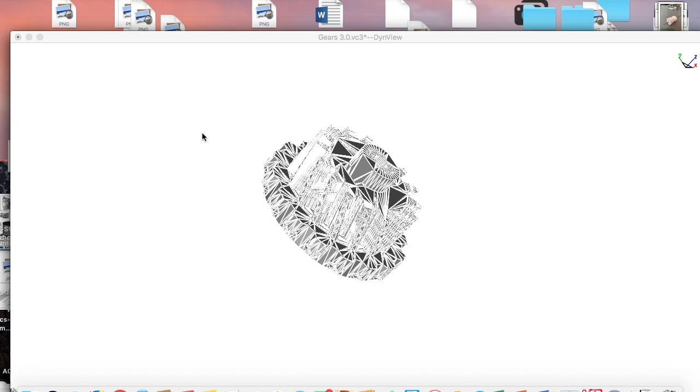Okay, so these are the gears that I have designed, but I did them in SolidWorks as I explained in my ERN, and I will explain during the presentation day, and that's why you see all of these different lines.

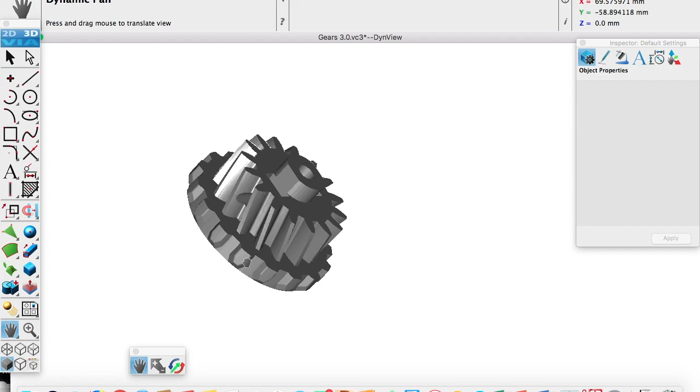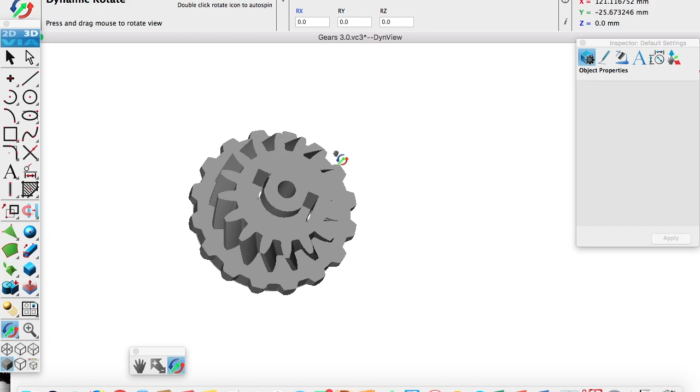When I click it, it looks fine, but the way it goes from SolidWorks to VCAD, something goes wrong. The difference between making it in SolidWorks and VCAD is like the difference between a hypercar and some regular car you find every day. It's like black and white versus color.

It's so much easier, so much more intuitive. That's why. The reason I have all these in one file is just when I was sending it to Carrere, it made it easier to print if they were all together. But these are some of the ones I have created.

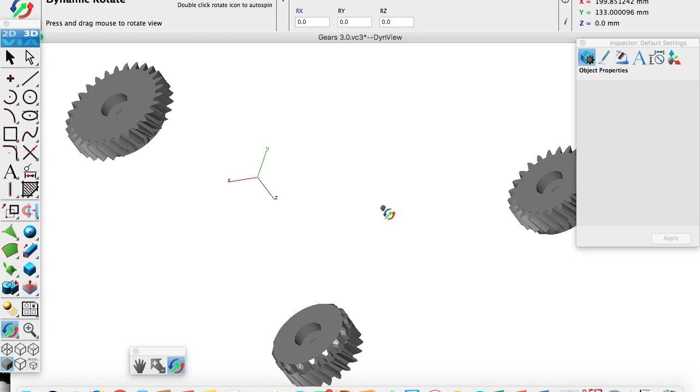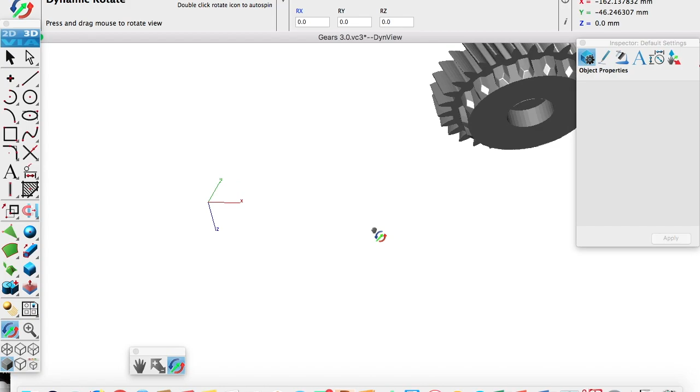And the first one I ever created was this guy. This guy right here. Sorry, no, it was this guy. No, this guy right here, and he took a very long time in VCAD.

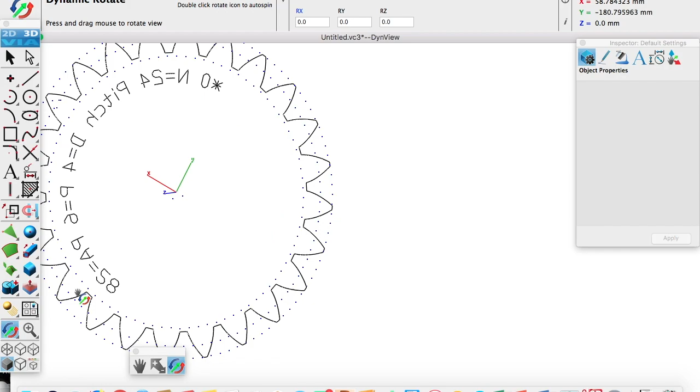It was hours and hours, and you can see I still have the template from the gear generator that I downloaded because it took a very, very long time to draw individual lines to match up with these points, and then use the spline to go around, whereas in SolidWorks it's just way more intuitive.

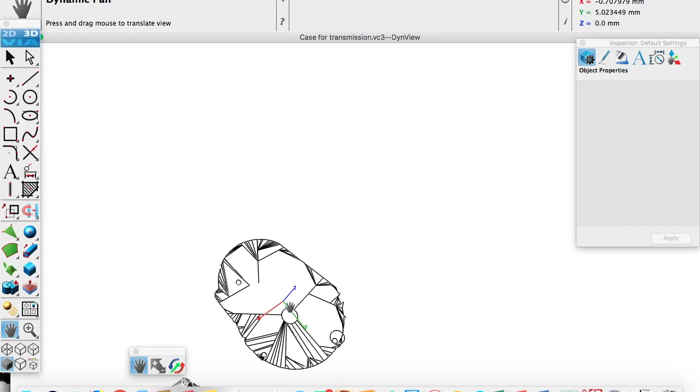And you can see right here that this is the start. I left these in, but these were when I started in VCAD. You can see all of the lines I had to draw to be able to get the shape, the bottom shape of the spline or of the housing.

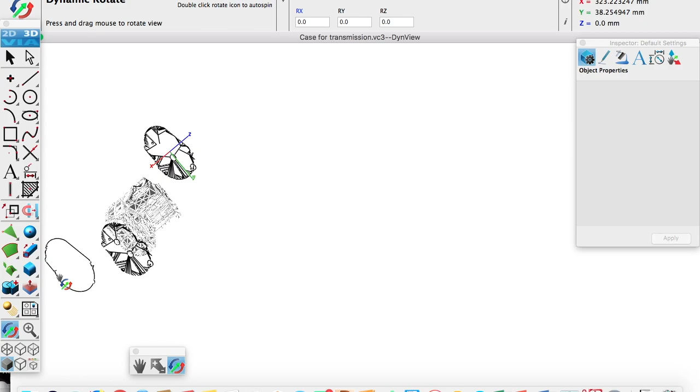Yeah, there it is. You can see without all the lines, that's what the bottom shape looks like.

So then I'll move this over here. And then if I went over to SolidWorks, I was able to create it much easier. There's milling tools, and it's way more intuitive.

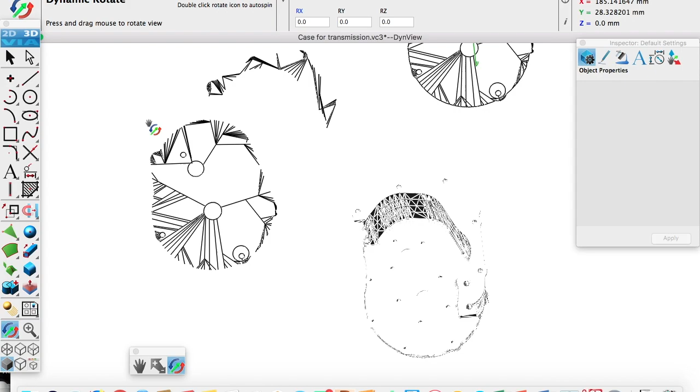But you can see I did start everything, this too, also in ViaCAD, and these are all little tiny lines drawn to the outside. So then I use the spline to get all around them to get the exact detail I wanted. But it did take a very long time.

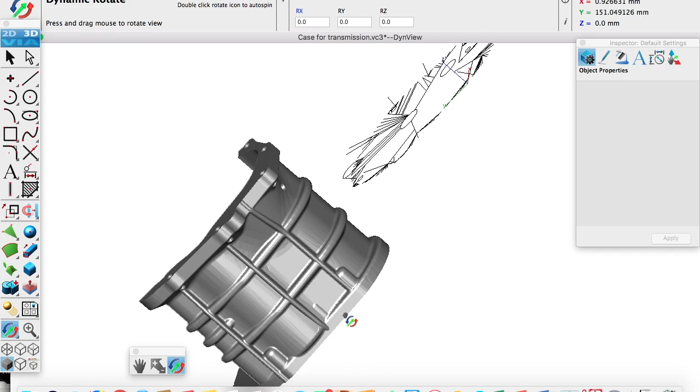So when my brother came home and showed me a different way, it was very appreciated, because I don't think I would have gotten anywhere close. Even though I didn't get it done, I don't think I would have gotten anywhere close to where I am now.

So yeah, that's it. And I was gonna show the Arduino code for the H bridge. If I had gotten it working, I'd use that to run the transmission to show you that it works. But I'm sure many people have already seen it. It's in my ERN. I used it for my previous ISP, so I'm pretty sure it's all well known to everyone, so I didn't see the point in making the video longer and including it.

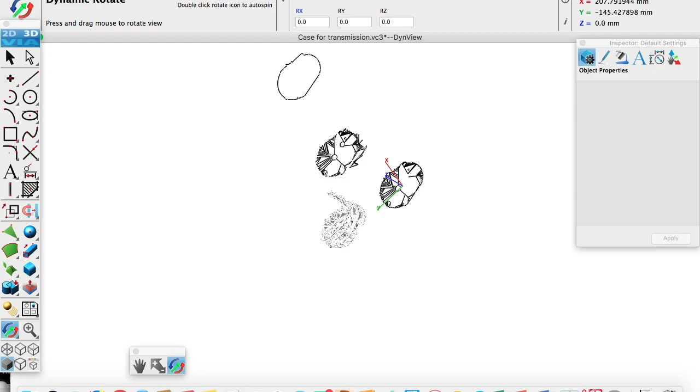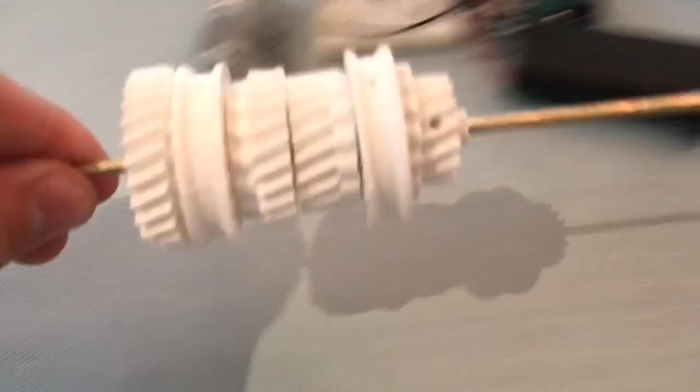But I just have it wired up here because I built it a while ago, thinking that I was going to finish the project until I realized how complex it was. But I have this part right here, and unfortunately I had made a housing for it and a bottom part, but unfortunately that wasn't able to be printed in time, so hopefully I can get it for Monday's presentation day.

But this is basically the top part, and this piece, there's another rail that attaches up here that when you shift it, the shift lever grabs this piece and moves it back and forth to switch from this gear to this gear. And then the same with another shift lever, it switches from this gear to this gear.

So that's that. There's bearings inside of all of these gears to make them slide easy. As you can see, that slides fairly easy, barely pushing on it, and it's just sliding, so that's nice. There'll be more to show on my presentation day.